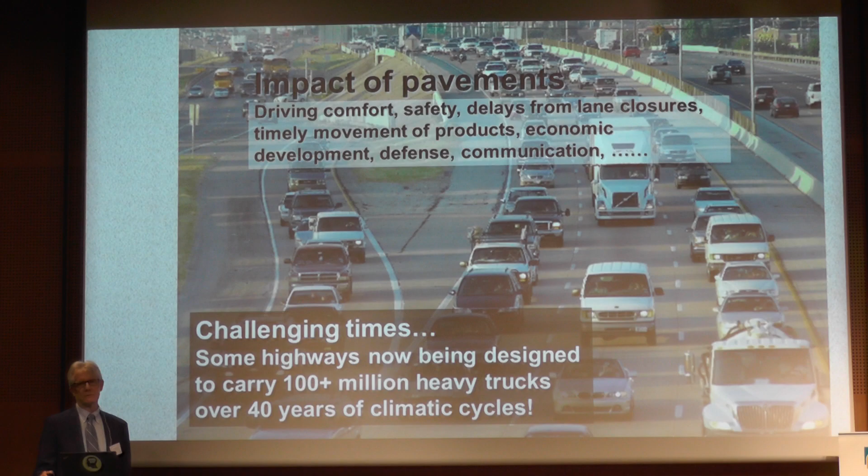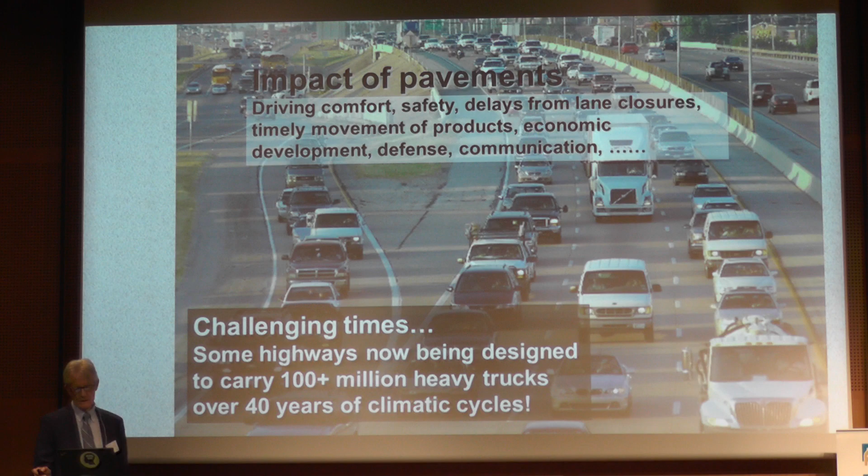Pavements are there, and it's a challenging time for pavement engineers. I've been involved in pavements now for well over 40 years, and the demands just keep increasing. Now we're asked to design highways for 100 million heavy trucks going down the design lane over a period of 40, 60 years. Many states now require 40-year designs, others are up in the 50 and 60 years, and I'll even tell you about one longer than that.

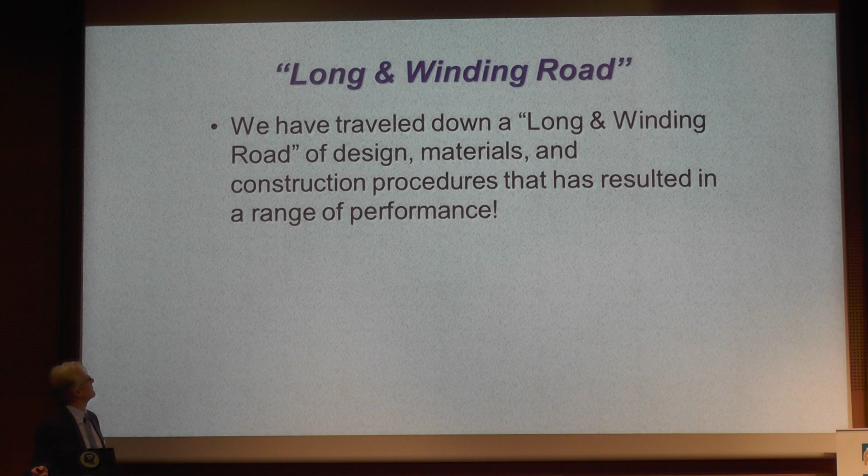So we've traveled down—I always liked music, I was a musician before I became an engineer—a long and winding road, you all know that song. But it has been in every area of pavement, such as design, materials, construction, and it has resulted in a range of performance from fair on the low side to excellent, mostly quite good actually over time, over these many decades around the world, particularly in the US also.

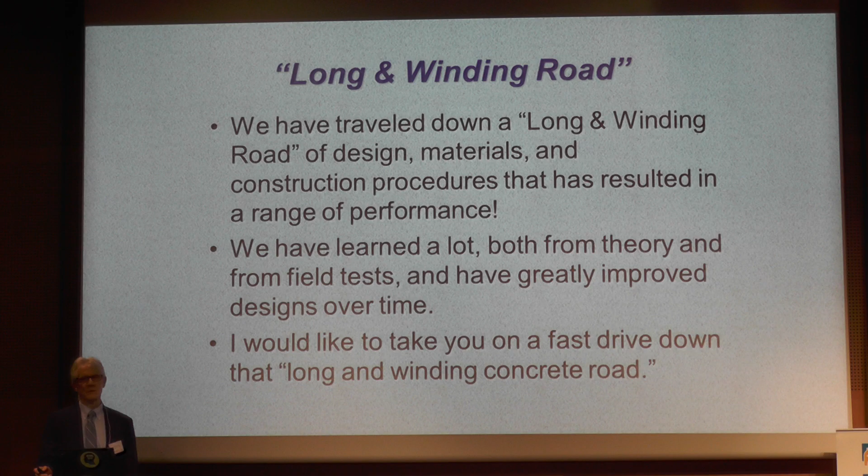And we've learned a lot over these decades. We've learned from experience, I hope—at least we've tried to—from field tests that we've put in the pavement. We have a lot of big experiments where we monitor performance over many years. So I'll take you on a fast drive down that long and winding road of concrete pavements today, focusing mainly on design.

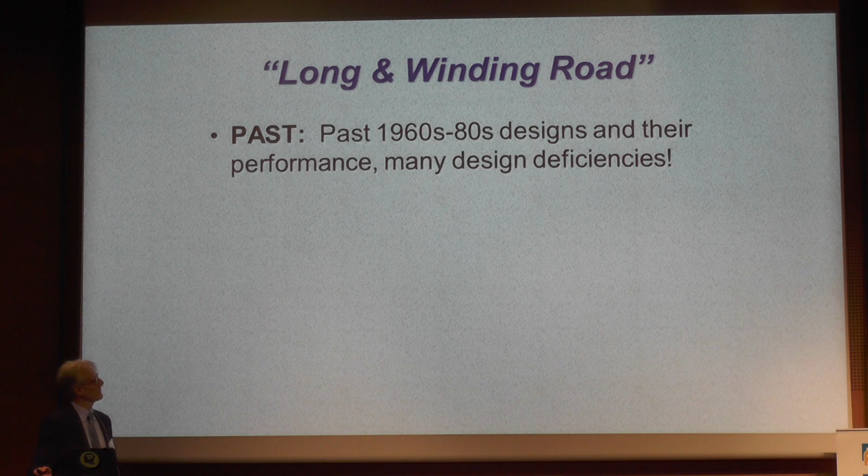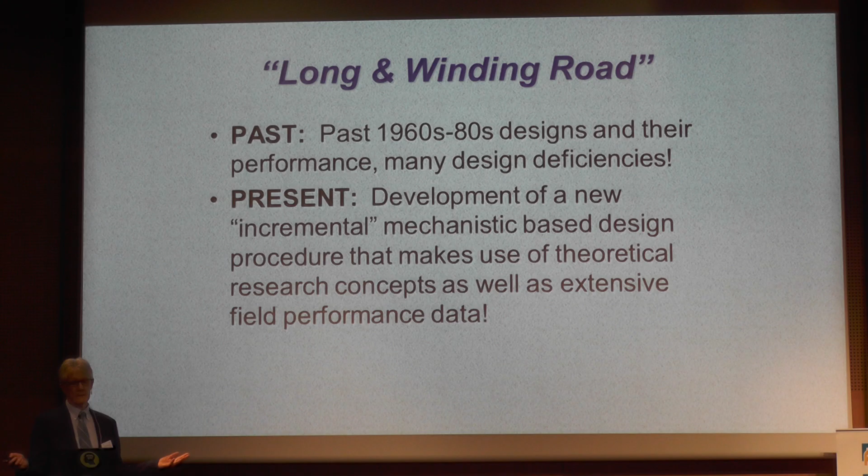We'll talk a little about the past, starting in the 60s when I started my career, then moving into the present time, and a little about the future: the incremental mechanistic-based design procedure that has just been developed and is under full-scale implementation now in the US, and a lot in Canada also, that makes use of theoretical research concepts on one hand, as well as field performance on the other. We'll talk a lot about that aspect of it.

I'm going to just focus, due to time constraints, on jointed plain concrete pavement. There are several other types. Continuously reinforced is a very common type built in the United States, Belgium, Australia, and a number of other countries—that's a very good pavement also. Pre-stressed pavement is another type starting to be used in very heavy urban areas. And thin concrete, small jointed. I'll mention a few of these things during the presentation.

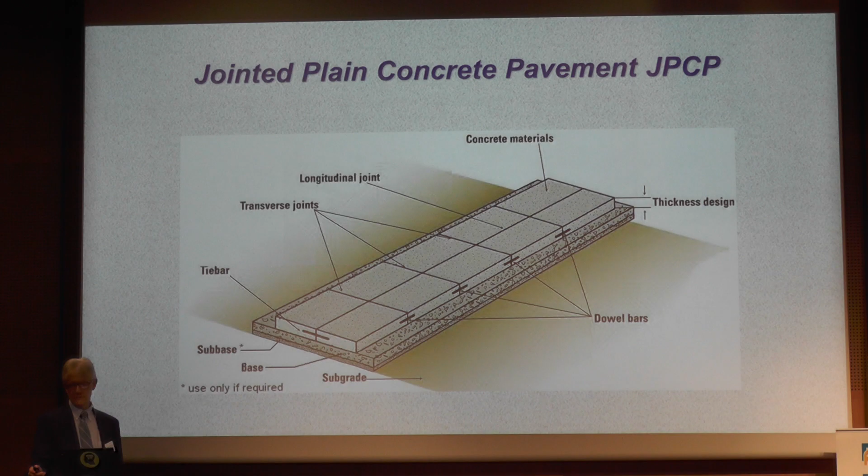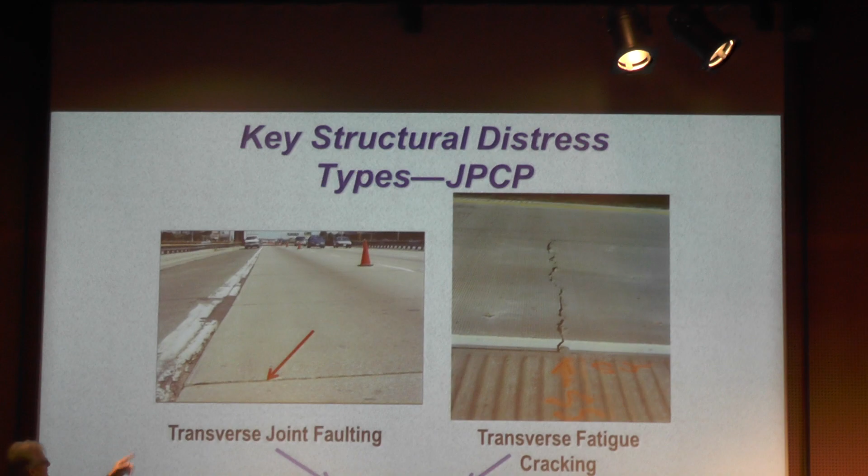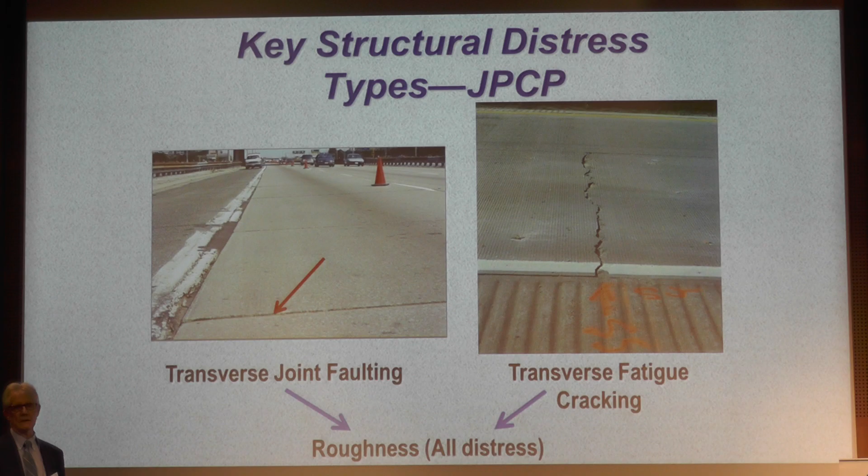The two or three different kinds of distress types that we really deal with in design: transverse joint faulting, as you see at that joint, a step off at every joint—it's a structural problem from repeated loadings and poor design. Then we have fatigue cracking that's primarily in a transverse direction, either top down or bottom up. Both of these contribute to roughness, but there are also other distresses related to durability issues of concrete. We certainly still have some of those over the period of time.

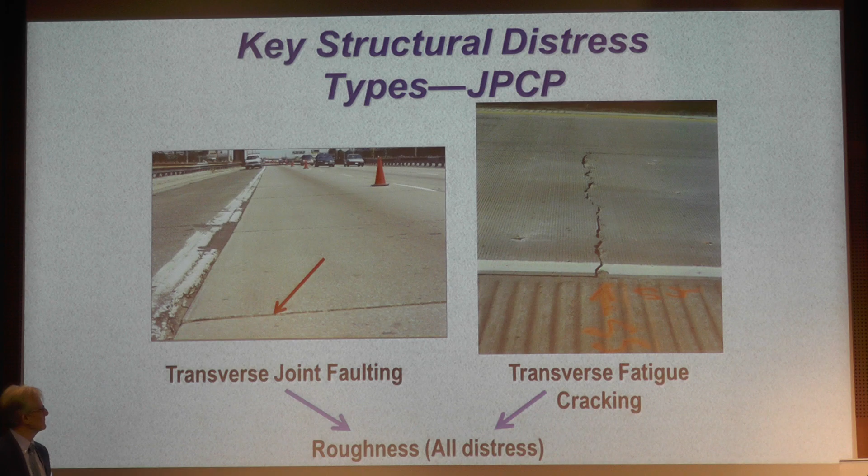And construction errors that are made contribute to some other kinds of distresses like spalling, and longitudinal—if the joints are not sawed properly, you can have cracking due to just poor joint forming. So we'll focus on those two.

Let me just say a few words about these two. If you put dowel bars in that are properly designed, of sufficient diameter to reduce the bearing stress, you can eliminate faulting as a problem—you can eliminate it. As you see the load approaching that joint, the deflection is very small, actually it's half of what it would be without a dowel bar.

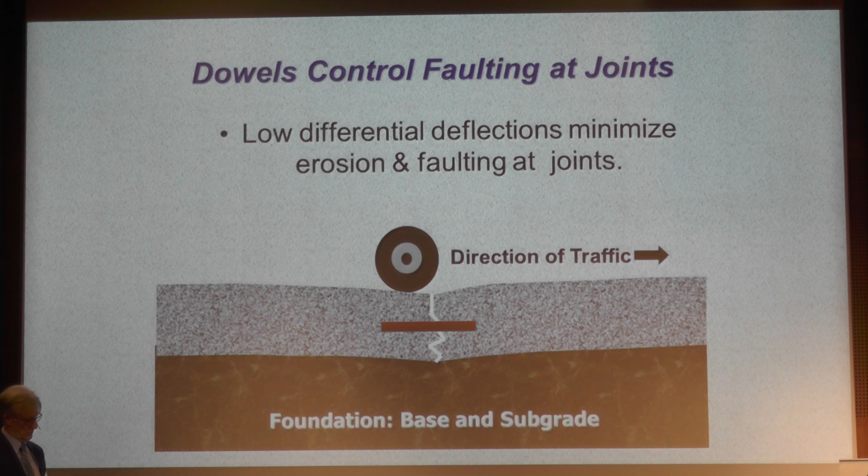So it's quite different. Down below, in the base course, there's always water under pavements it seems, and it moves whenever there's deflection. But when you have good shear transfer, your deflections are virtually equal—you have very good load transfer, so the movement of water is minimal and you don't really develop the faulting problem. Take out the dowel bar and you will have some problems if you have heavy traffic. That doesn't mean you need dowels on every project.

We have lots of subdivisions of homes and businesses where you do not need dowel bars. There's just not that many heavy trucks. But on most highways, you do.

Unfortunately, starting in the 60s, lots of agencies removed dowel bars because it was cheaper. That temporarily reduced the cost, but not over the long term. So we have to think long term with pavements.

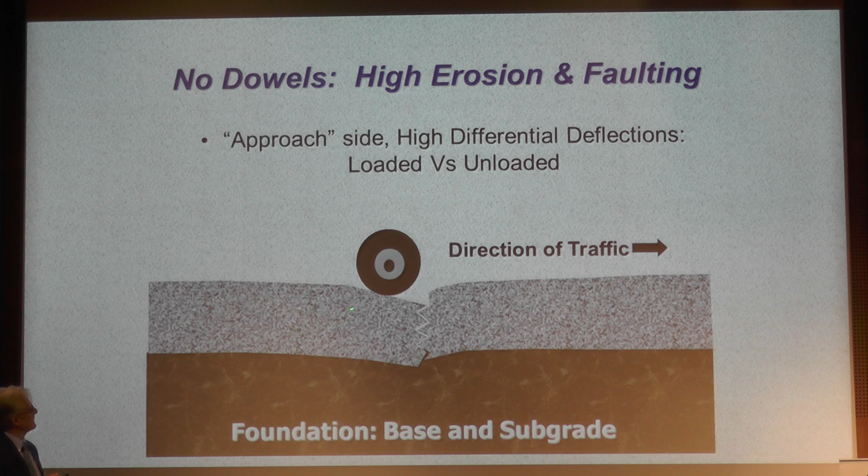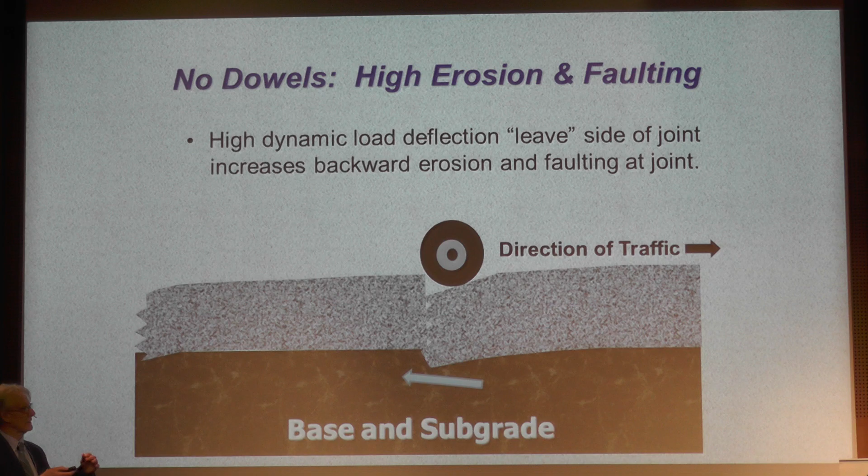So you see a big deflection here, and as soon as that load hits the other side, there's a big dynamic impact there, and the net effect is water and fines moving this way that lifts up that slab, creating the faulting, the step off at every joint going down the pavement.

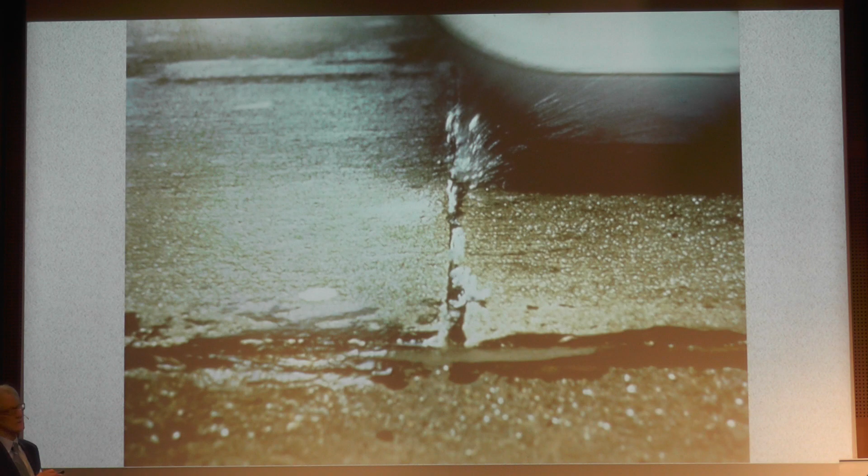And you can see that water's under a lot of pressure. We have actually measured that, and it's a couple hundred PSI, which tends to erode just about everything but concrete. So that's something we have to deal with.

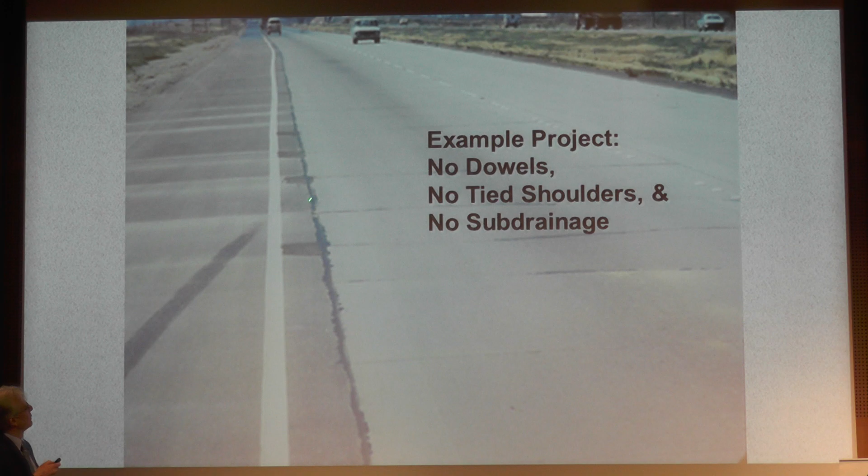There's no dowel bars here. There's no concrete tied shoulder. There's no edge support whatsoever here. And you see that there's erosion, and the fines from the cement-treated base are eroding away. Pretty soon you have lost a lot of support out of all of this, and you have no real subdrainage either.

And you can evolve into some joint faulting, loss of support, which then can create additional cracking, and all of that causes roughness. Not a good storyline here. So all of these things can be solved in design, and that's hopefully what we'll be talking about in this presentation.

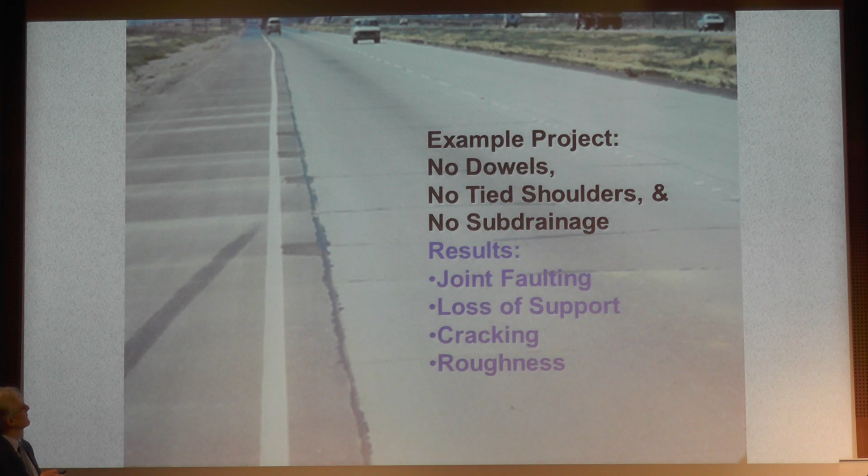Now the other issue was the transverse fatigue cracking from repeated loadings. This is a slab that was about 6 meters long in Pennsylvania. It was very, very thick, more than 35 centimeters, and developed within 4, 5, 6 years a lot of cracking, even though it had a tied shoulder.

What caused that? Well, when you start building long slabs going more than about 5 meters, no matter what the thickness is, you create a lot of issues. Particularly, not only is the loading itself bad, but it's the loading combined with temperature gradients and moisture gradients.

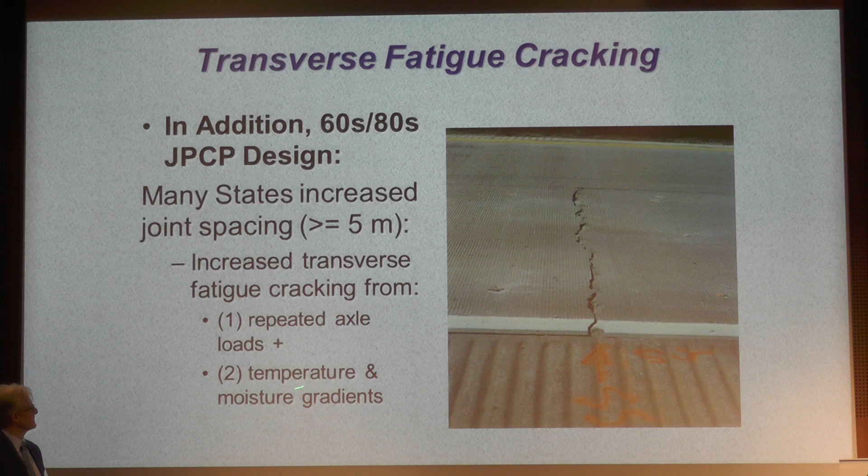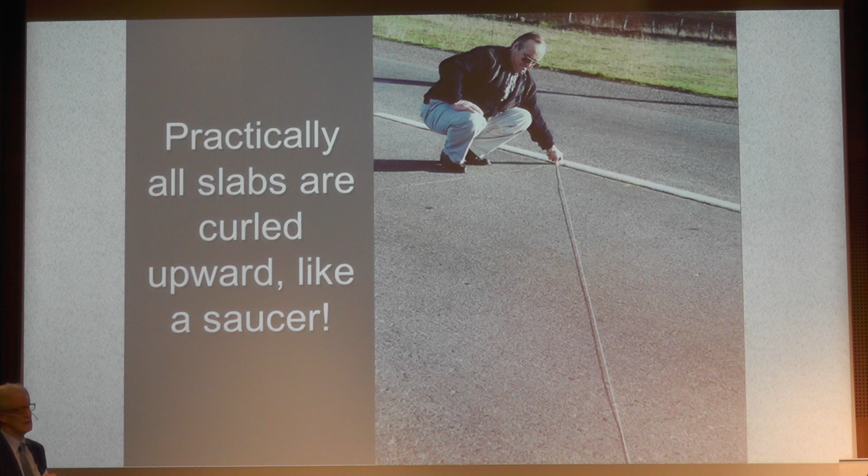That means that the weight of the slab plus any loadings that come on the edges of it is going to create a top-down bending stress out here at the edge that can lead to that transverse crack that you just saw. For example, there's a lot of studies that show this.

This is graphs from Michigan and Minnesota. Here's your joint spacing, 3 meters long. You have no cracking whatsoever on this project. Both two different projects over 10 to 15 years.

But as you increase the joint spacing, you see a little more cracking, a little more, and then suddenly it just takes off. Much excessive. Maybe there's more traffic here, so you get more combination of the stresses combining and interacting together to create more fatigue.

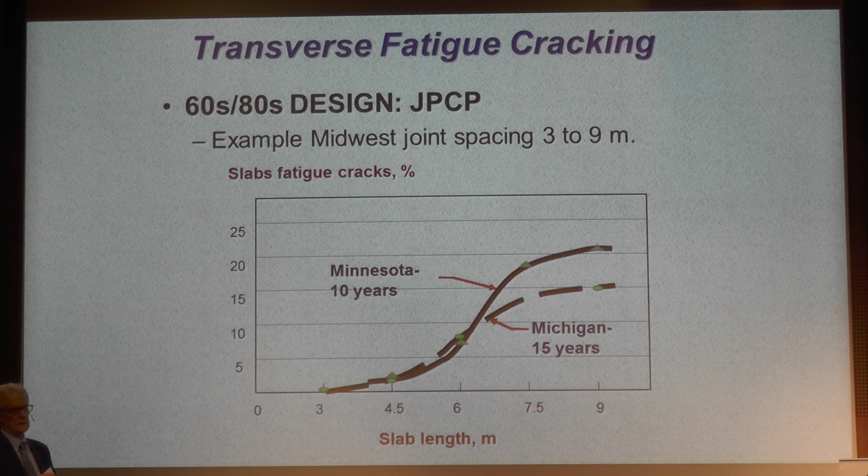So this has just been shown time and time again. No matter what the thickness is, once you start exceeding a certain length of slab, you start developing cracking. And we never could consider this in design until recent years, which we'll get into in a few minutes. Here's just a little more of an example of that.

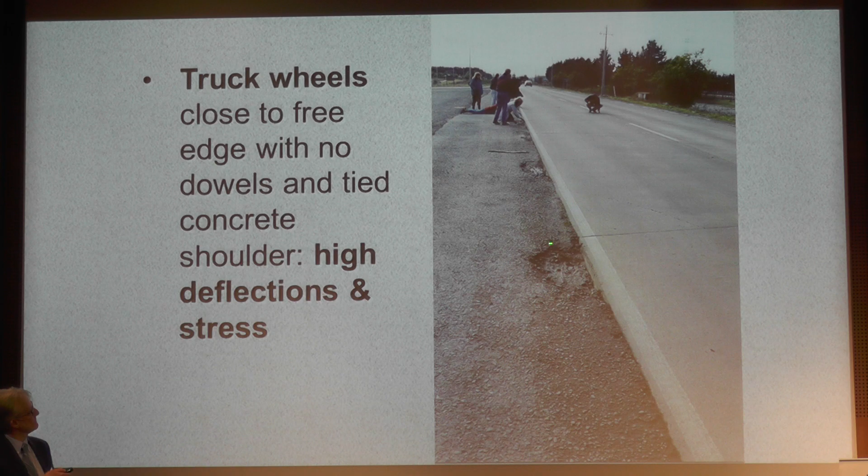So you get loss of support, and you see a crack is starting there. Even over here, you get some loss of support. And as you look at another slab down that roadway, look how this is eroding along here. And this is breaking off.

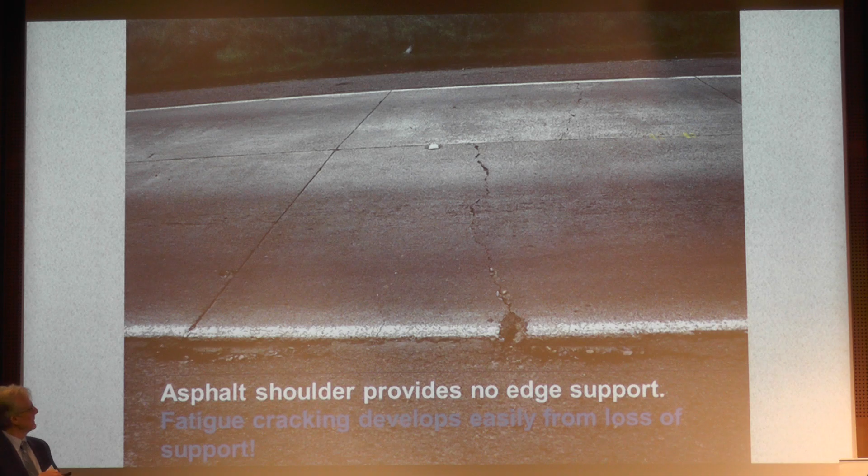A wheel load here creates a tensile stress right here. Eventually you get a crack. So these are the things we must prevent as we design pavements like this, by providing load transfer, providing thickness, providing good support and drainage for these pavements.

Another thing that's happened in the US, and probably in other countries, is that back in the 60s, we never imagined that there would be this much truck traffic. We assumed 5% of all traffic would be trucks. Well, just a decade later, in the 70s and 80s, it was like 20% or 30%. You know, 3 out of 10 vehicles are trucks now on many roads, and even some 50%.

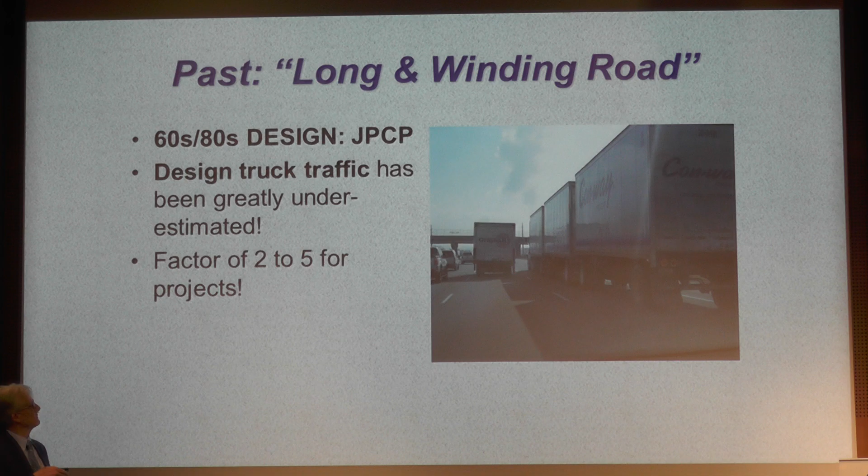So it's unbelievable how much truck traffic has grown as the economy has grown. Truck traffic has just skyrocketed, and it's been true in Europe too. And not only that, but the weight of the axles has gone up in addition to volume.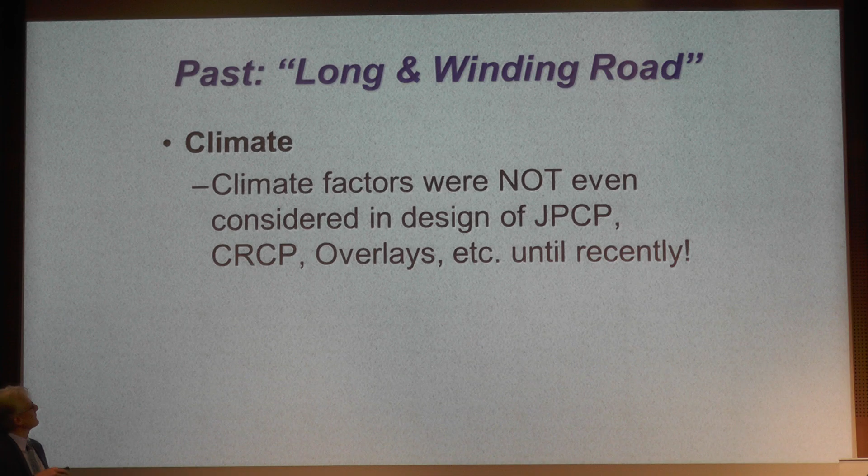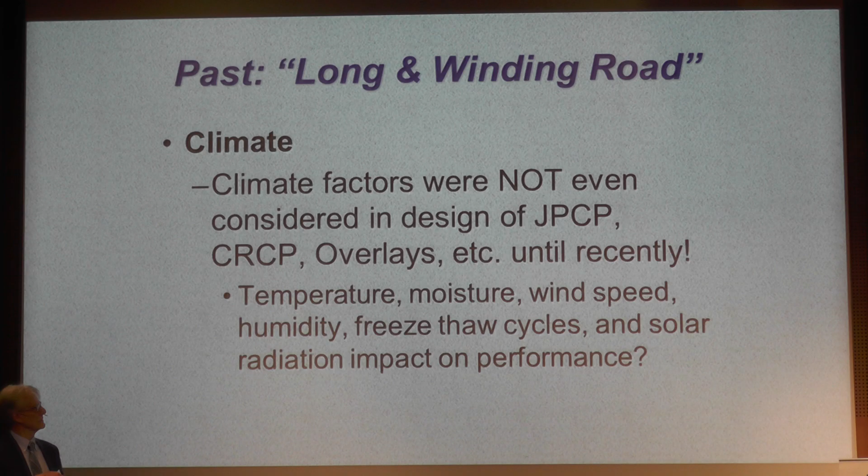Back in these days, climate was not even considered at all, either on asphalt or concrete. There was no consideration on these different types of pavements until just recently, as part of regular routine design. There was no way to account for temperature, moisture, wind speed, humidity, freeze-thaw cycle, solar radiation, and its impact on pavement performance. Virtually none of these were ever considered in design, and that led to a lot of problems.

So let's now talk about the present and what we've done about them. On one hand, we have theoretical distress models starting in the 1920s with Westergaard, developing closed form stresses and deflection models. Those were wonderful and helpful and insightful, but they didn't really give us the complexity of loading, especially when it comes to temperature gradients and moisture gradients, that we really needed.

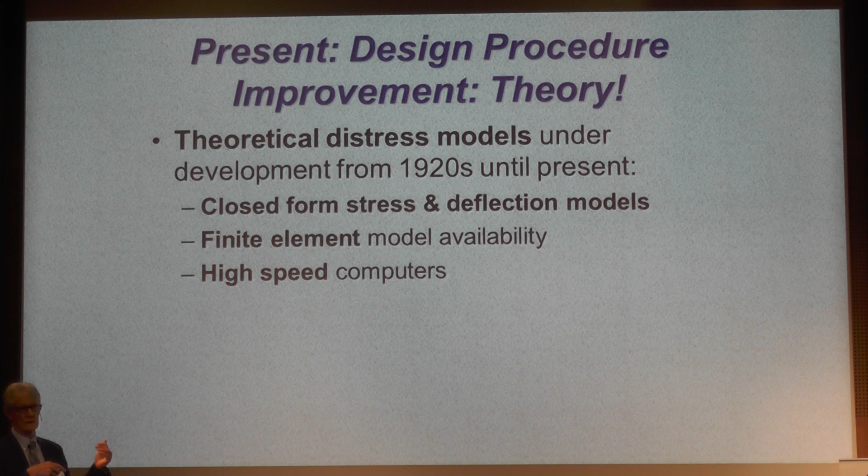When finite element came around in the late 60s and 70s, that was a godsend for pavement engineering. We could consider layers, joint spacing, multiple wheel loads, the gradients through the slab, and layers of base course and subgrade. And of course we needed high-speed computers. Even when we were developing this procedure in 1998, the computer speed was not that fast, and it would take 30-40 minutes to make a single run. That was very difficult to deal with.

There have now been developed, starting in the late 60s and 70s, some really good climatic models that take weather station data, hourly temperatures, wind speed, relative humidity, precipitation, and solar radiation, and convert that into temperatures down in the pavement. We can also model joint load transfer, and really get a handle on the contribution of a base course. Before that, we just assumed a spring constant, a K value as we call it. Well, that's not very good structural modeling, because the base course does a lot more than that.

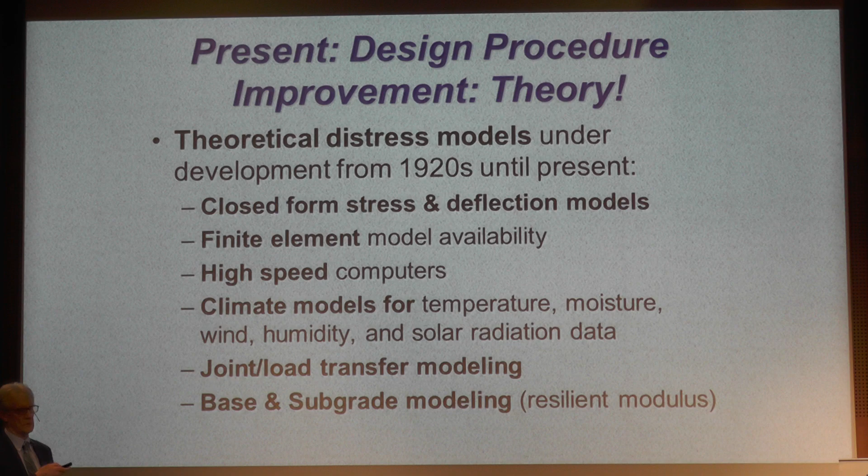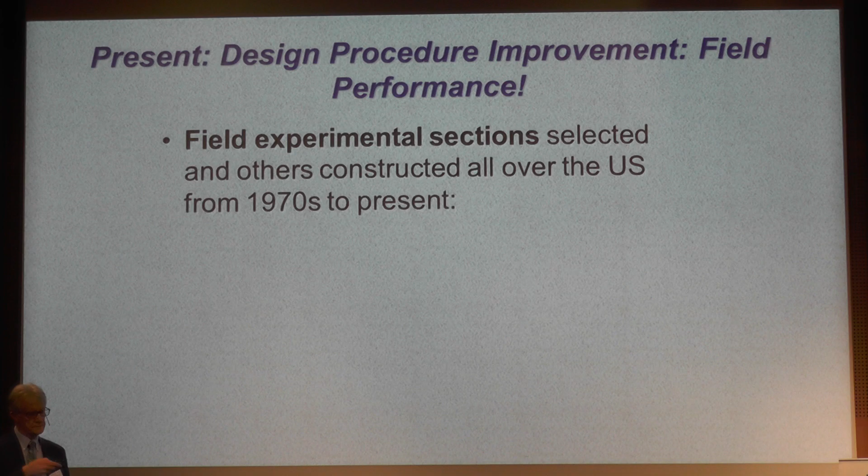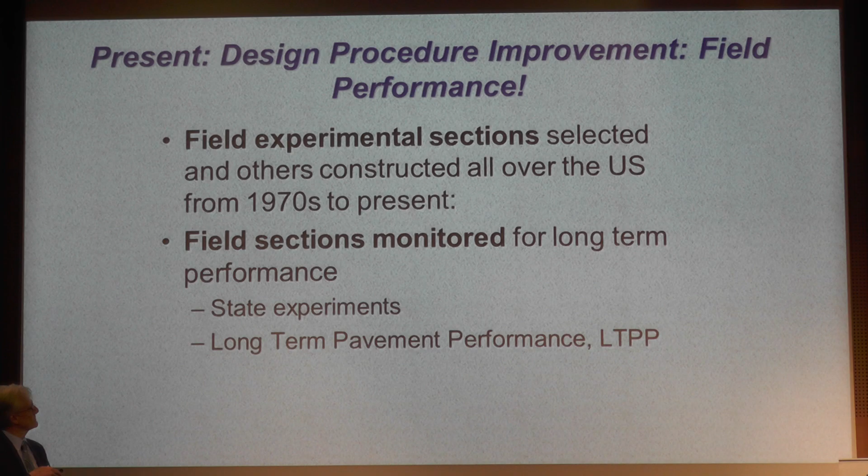Now, that's all theoretical modeling on one hand. On the other hand, there was a lot of experiments built throughout the country. Starting in the 70s, different states built some, and then we have this long-term pavement performance program with hundreds and hundreds of experimental sites. They've been monitored over many years, with lots of data collected on all kinds of cracking, faulting, roughness, and many other things.

So those two are at the ends of the extreme, you might say, but if you can put them together in a marriage, I think it's about the most ideal marriage in the world. They complement each other. You take the field performance data and use that to calibrate structural theoretical models that have been put together, which is logically correct. Along with finite element, you put them together and calibrate the two. It has been surprising to a lot of people how well these mechanistic based and field calibrated models can actually predict field performance.

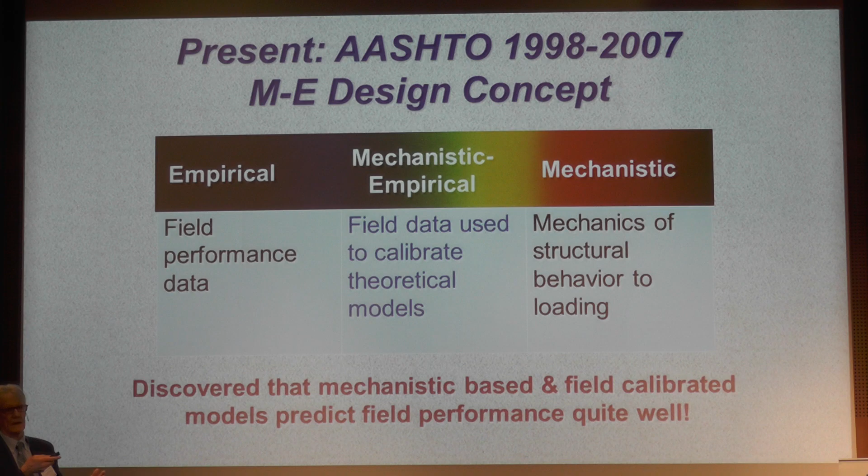And that was the goal. If we can predict performance that's out in the field today, add reliability into that, we have a design tool we can actually use. This is the tool, started in 1998. There were many attempts before that did some good and valuable work, but this was a big team of people on both the asphalt side and the concrete side. I was really fortunate to be on the concrete side and help lead that effort along with a lot of other really, really bright people.

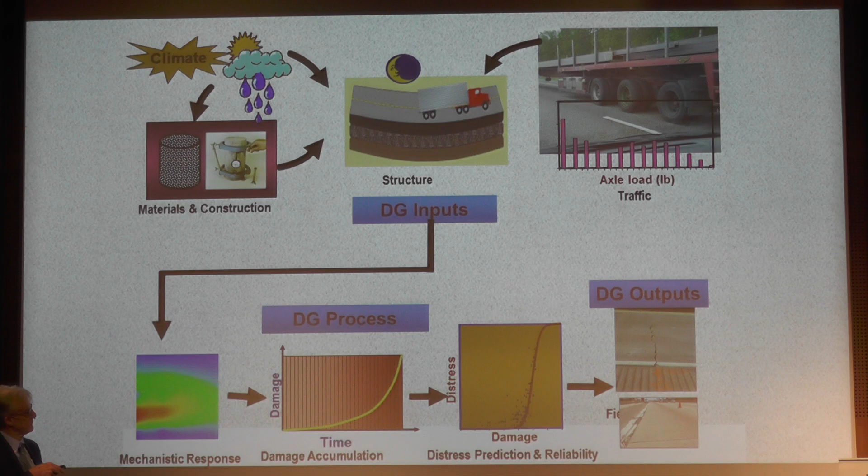Considering the climatic effects, the materials and construction aspects, the structural and the joining, and then putting in the real traffic loads, the whole distributions from small to large of all kinds of axles, singles, tandems, tridems, all of those. Put them together into the finite element model, calculate stresses and deflections, then compute damage and sum that on basically an hourly basis over the whole period, whether it's 20, 30, or 40 years, hourly, daytime, nighttime. Everything reverses for concrete. You have solar radiation in the day, at night you don't. They compute damage, and out of that comes a calibration factor, and out comes cracking and faulting too.

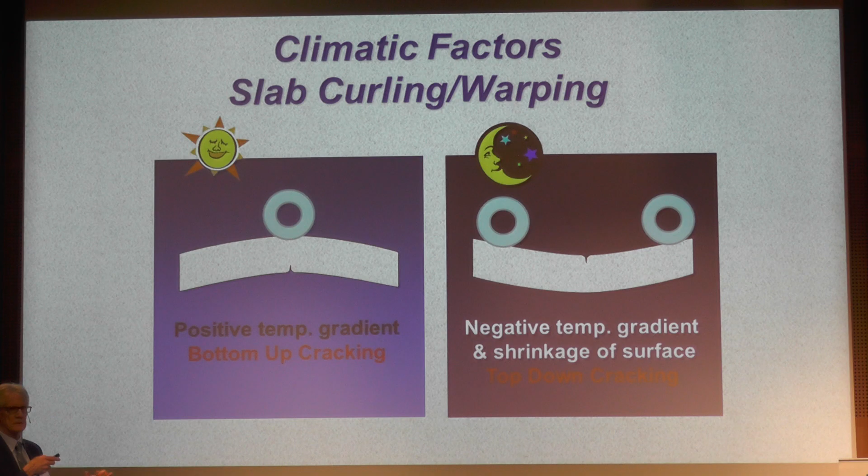Just to illustrate that, in the daytime you have totally different loading situations. You have hot on the top, cooler on the bottom, so the slab wants to look like an upside down saucer. At nighttime, it's the complete reverse, and with different loadings, you get top down cracking on one side and bottom up on the other. The procedure considers both and combines them into a single transverse crack.

And then with regard to traffic, all kinds of things from the volume, the classification, all the different types of axles and their load distributions.

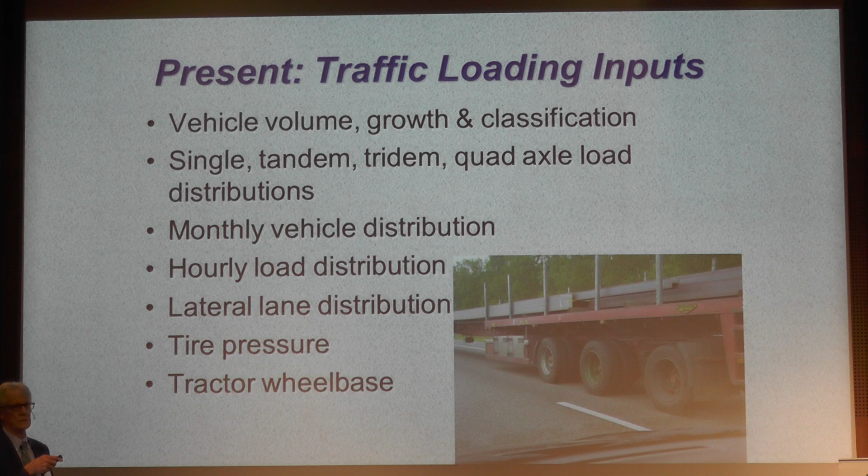Monthly, yes, traffic does vary monthly, especially on more tourist kinds of roadways. There's hourly distributions, lateral lane distributions, tire pressure, and wheelbases—all of those are loading or hitting our pavements every few minutes, every few seconds actually. And then for climate, there are really good weather stations now where we can get hourly data on 5 different things that all affect, in one way or another, performance of concrete pavements as well as asphalt pavements.

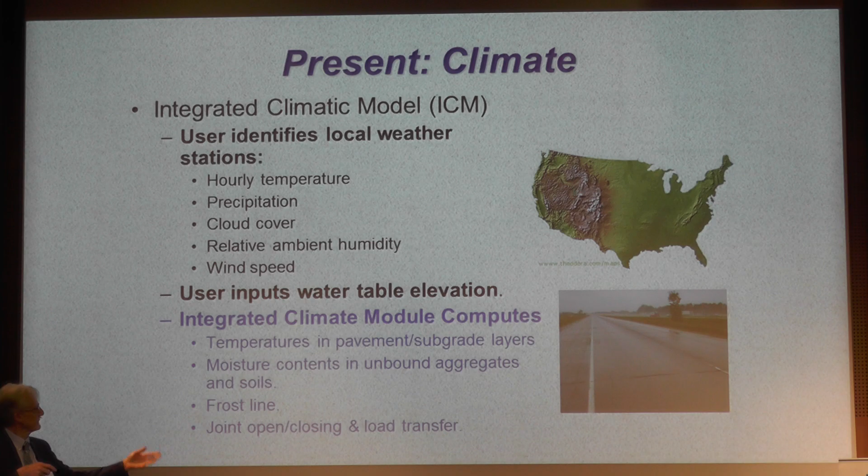You have to input the water table, and it makes use of that with the soil suction and all kinds of soil models. Then it calculates temperatures at virtually every inch down through the pavements, and moisture contents for all the unbound materials, frost line, the joint opening and closing, on virtually an hourly basis throughout the design life. So for every layer, you have like 3 different kinds of properties.

You have physical properties such as strength, modulus of elasticity, thermal properties such as coefficient of expansion. That was a shock to a lot of people how critical the concrete thermal expansion was. People hardly could believe that with limestone you have very low expansion, with other sources of aggregates like chert you have extremely high, or river gravel, 20% higher, 30% higher, or even more. And so that affects cracking and faulting and joint opening and closing big time.

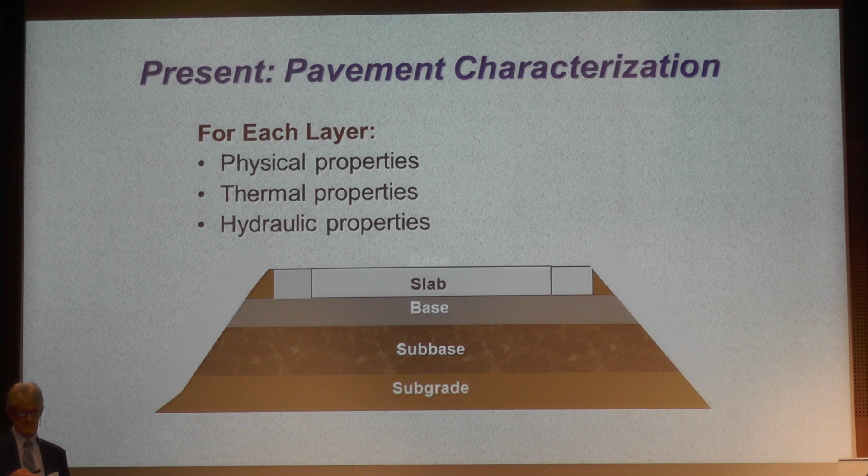And then you have hydraulic properties for the unbound types of materials, the movement of water and the impact of that on modulus. So we created an incremental model that starts out at time 0 and starts incrementing. Because traffic in the first year is typically lower than it is many years from then, so every month the traffic will vary.

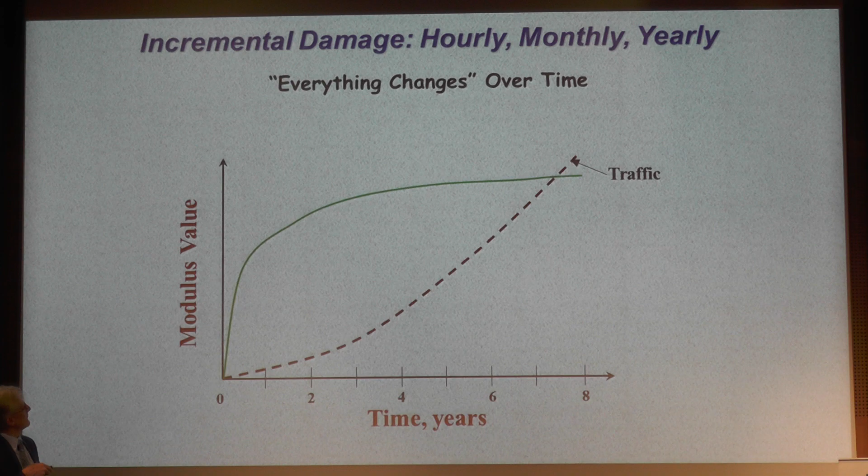The concrete strength and modulus vary. Shrinkage varies too—I really should have put that on here too. The modulus, if you have an asphalt base course, that's going to go up and down with the seasons, isn't it? Even on a daily basis.

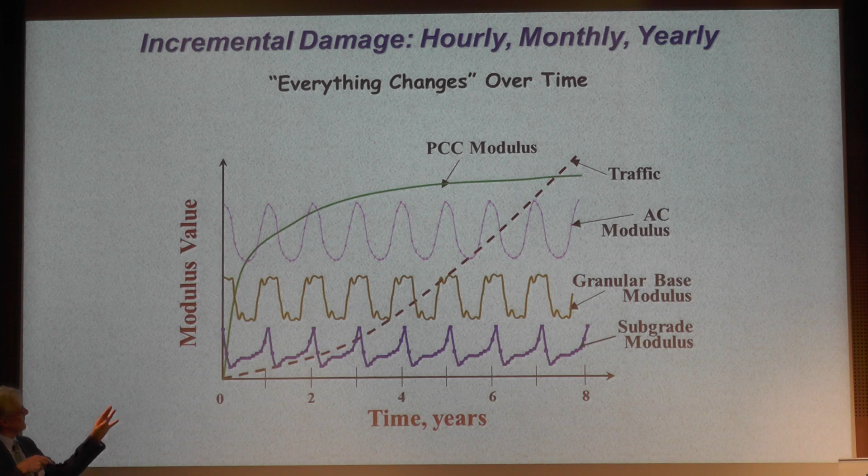If you have an aggregate base course, it's going to vary depending on moisture content and frost moving through it. Subgrade will have the same situation—in the winter it'll be frozen, in the spring it'll be thawed. And then every day you have axle loads pounding on that pavement. It's really a complex situation, isn't it?

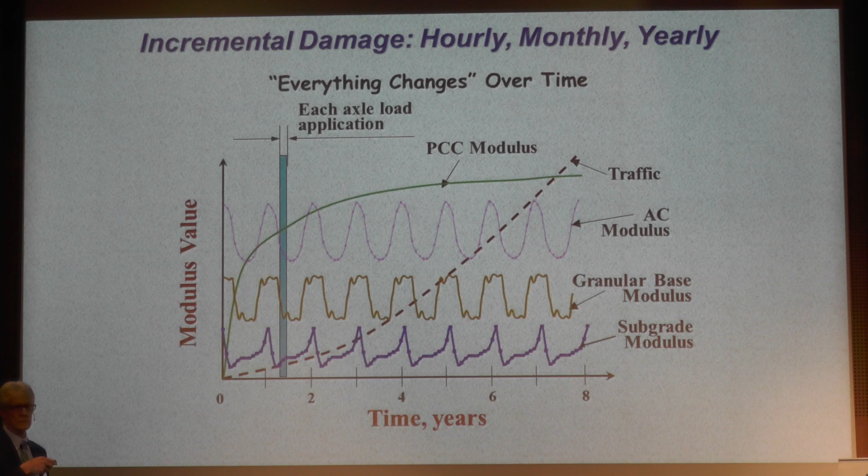Pavements—people think pavements are rather simple structures. Well, it's just not so. It's absolutely not so, it's an extremely complex system. And if we really try to model it, then it's even more complex than this by far. As time goes on, more theses, more research, it'll improve on all of this. This is just a draft, really, of the complexity of it.

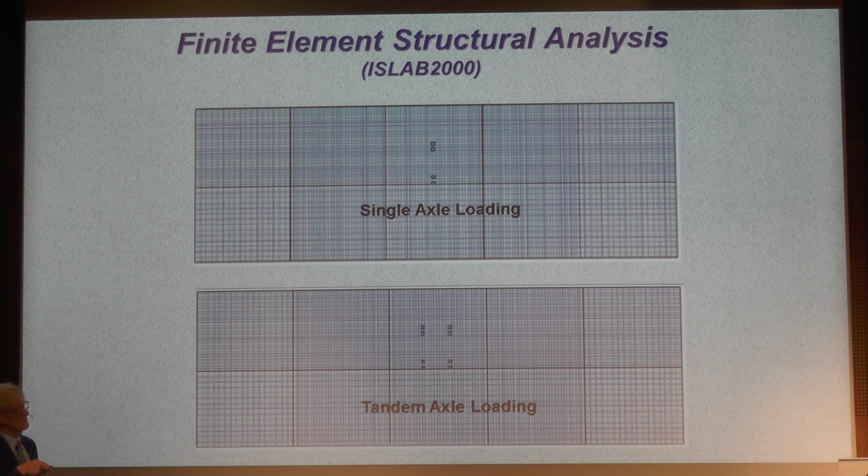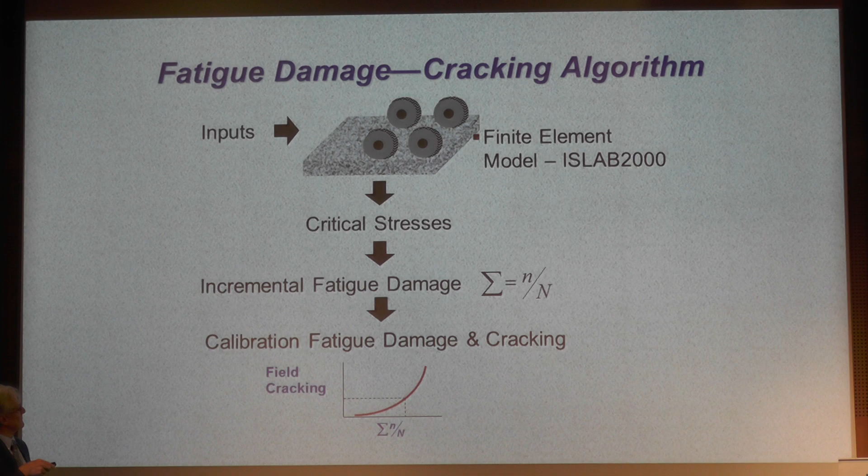With our finite element model, we can model virtually any kind of loading and put that into an algorithm, such as for cracking. Calculating our critical stress, we put it into a fatigue algorithm, like Miner's fatigue damage, which we have used quite successfully, and I'll show you how that is in a moment. Then we calibrate that, the Miner's damage versus field cracking. That gives you the tool you can use in design.

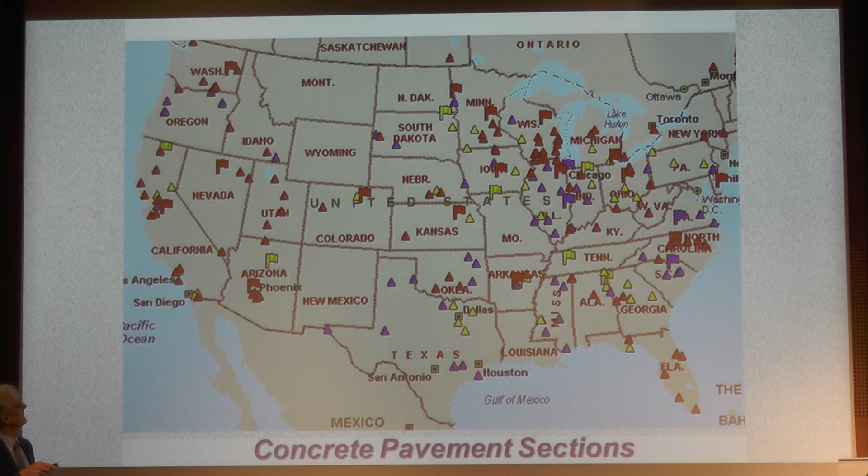This shows some of the sections in Canada and the US of different kinds of concrete pavements that were used in this calibration, spread from cold to warm, wet to dry. So it's a big mix of climate.